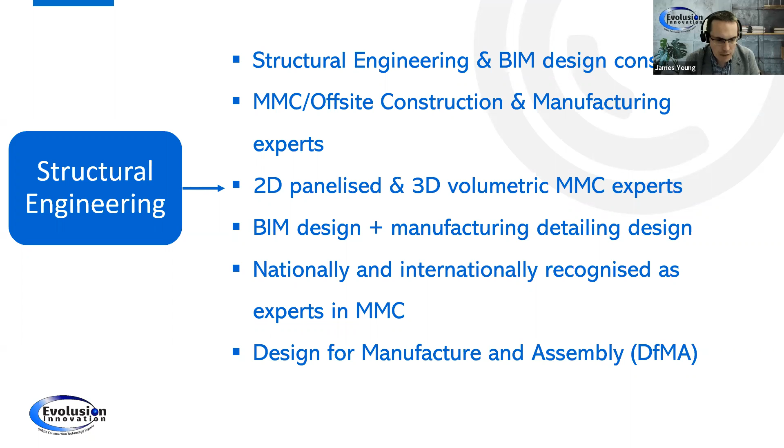We are MMC construction and manufacturing experts and work both in 2D panelized and 3D volumetric systems. As well as the engineering, we also work in the BIM design and the manufacturing detailing design end of it as well. We would be both nationally and internationally recognized as experts in MMC, and we work mainly around the philosophy of design for manufacture and assembly.

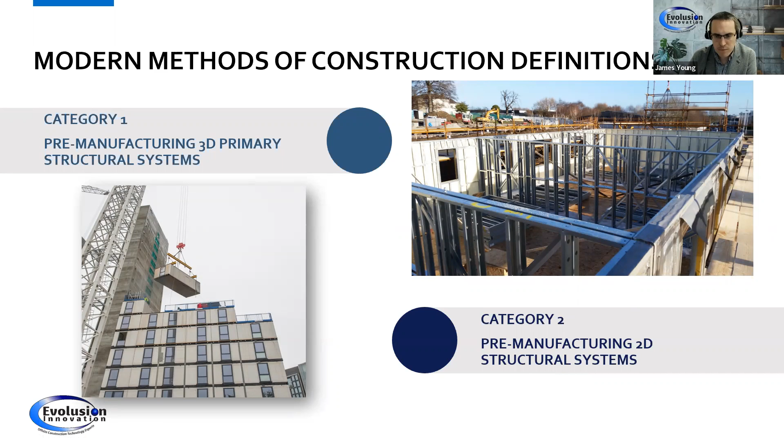The 2 main categories that we concentrate on are category 1, referring to pre-manufactured 3D primary structural systems, and category 2, mainly for 2D structural systems. Currently in Ireland, there's a few category 1 and a number of category 2 certified systems in steel frame. Darragh, who will be talking after me, is from Horizon, who will be one of the leading 2D panelized companies in Ireland at the moment.

When Evolusion work on any MMC project, we have a specific design process we use to deliver the projects from conception to completion on site. The process in which we work is designed to cater for the needs of pre-manufactured elements. The timing of manufacturing is different to traditionally built structures, and this has to be taken into account. So the 4 main items that cover this are your structural specification, the pre-construction model, manufacturing detailing, and assembly drawings. So I'll briefly go through all 4, but Darragh, I'm sure, will go through the final 3 points of mine in greater detail in his presentation.

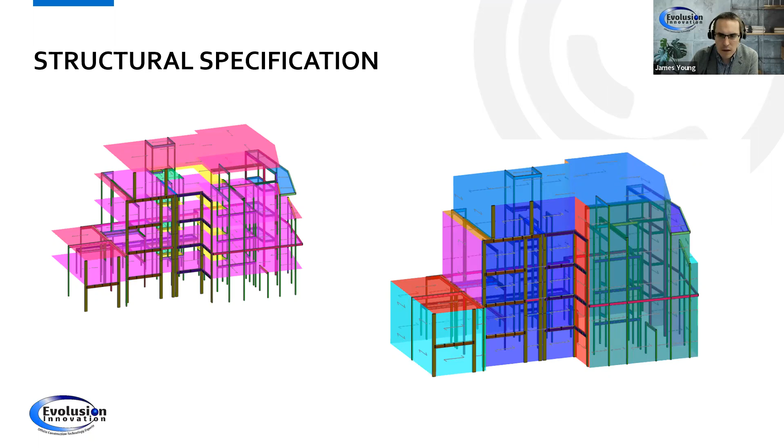At the structural specification stage, this is digitally modeled, but it's digitally modeled in similar ways to if it was any other building. However, as we generally work with systems required to be manufactured off-site, the digital design process of the physical elements is set up to suit the off-site design systems to ensure a high degree of accuracy is achieved and time efficient to allow the manufacturing ahead of site delivery. Out of that digital model that we would produce would be your stud specification, your hot rolled steel, bracing, lintels, fixings, and obviously your foundation loadings.

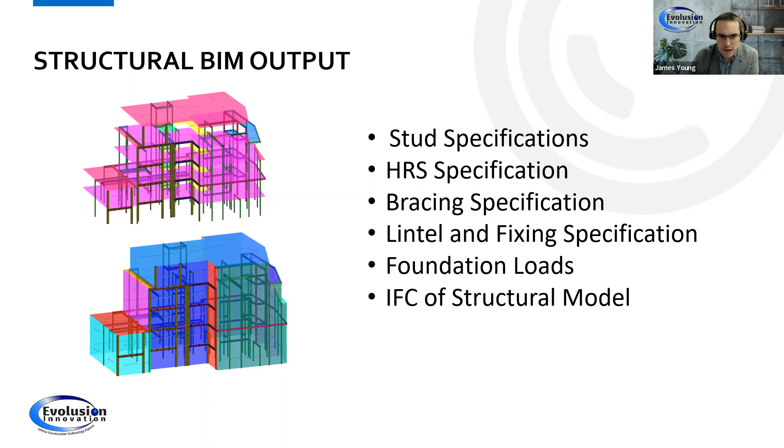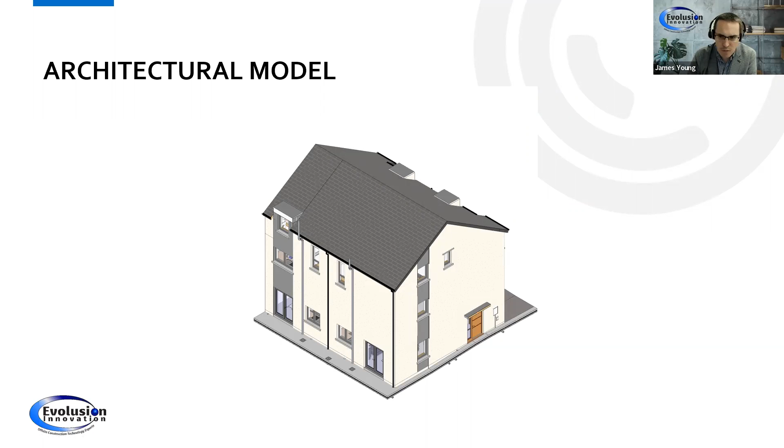And out of that, we develop an IFC model from our software analysis that can be moved on to the next stage, where we get into more the area of DFMA, or design for manufacture and assembly. When Evolusion works on any MMC project, we have a specific digital design process we use to help create the final manufacturing elements by the MMC supplier. Obviously, we will always start with an architectural model that more and more now is coming to us in a digital BIM format, but where we still get your traditional 2D drawings.

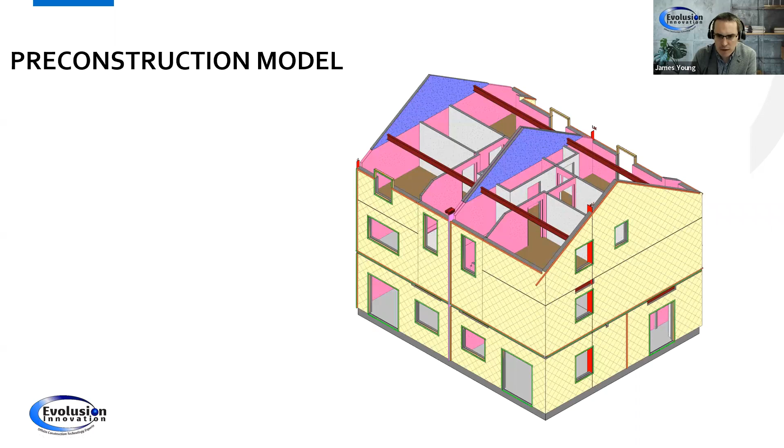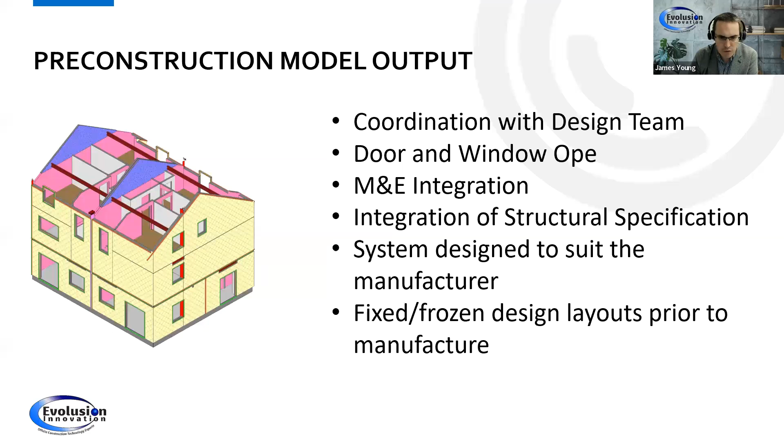But from that, we would develop a pre-construction model and create a model that is developed around the architectural model, but creates the information applicable to what the MMC manufacturer is going to produce. So within that, all families are parametric and are designed within the model to allow for each element to be tracked, procured, and manufactured. Again, Darragh will go into this in more detail, but the aim of the process with this model, typically for us in Revit, is to get to a stage where we have a fixed frozen design to start the manufacturing process.

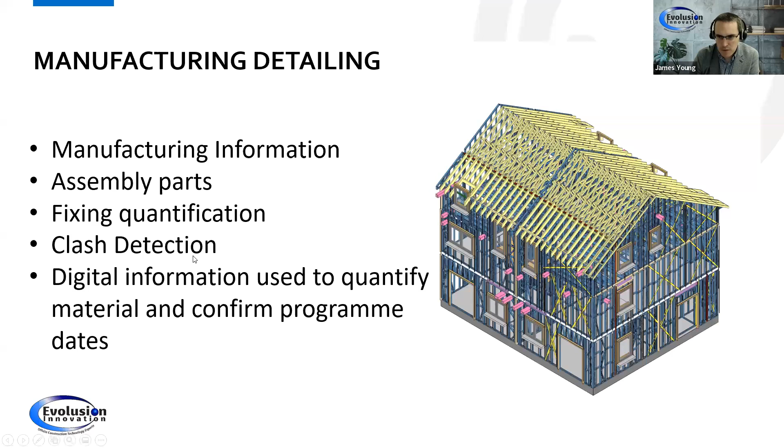Using specialist software, the structure is produced to allow for all the manufacturing elements to be fabricated, involving high degrees of accuracy. So you develop your manufacturing information, your assembly parts, fixing quantification, your clash detection, and the digital information that's used to quantify the material that one needs, and confirm program dates as well as other aspects of it. You're exporting hot rolled steel elements to your fabricator, and, I'm sure Darragh will go into more detail, your assembly drawings for your walls or your floors that go down to the factory floor.

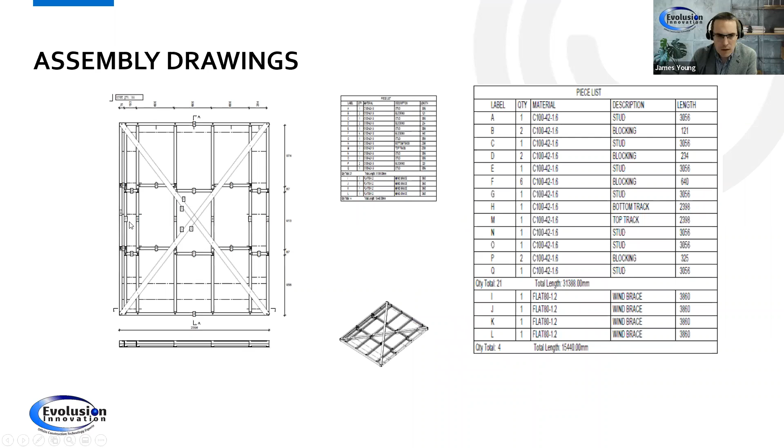The important thing when you're talking about MMC projects is obviously it all has to be pre-manufactured, but it has to be pre-manufactured to a high level of accuracy, some of which I've highlighted here. But to get to that stage, it's important that the levels of information through digital formats are developed and put together, working with the design team to ensure that when we get to manufacturing stage, these are the levels of accuracy that we're able to deliver and achieve.

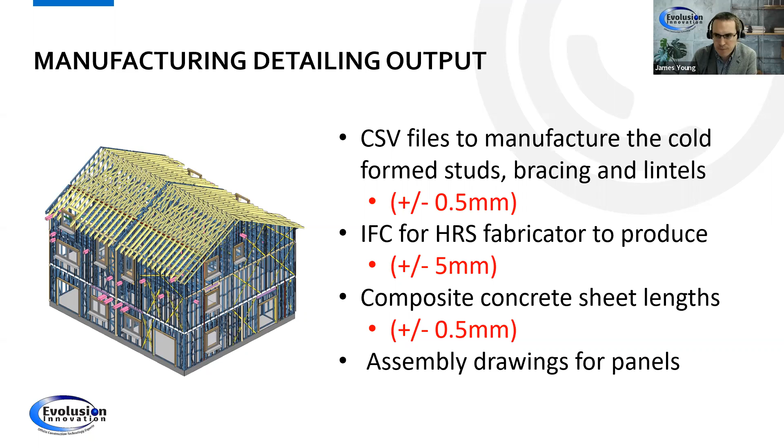Because precision engineered solutions require precision design processes. These are not systems that begin on site. This begins at the manufacturing facility. And the BIM design allows for accurate designs to be integrated into a particular structure to allow it to be manufactured correctly and on time. And our BIM design process is driven to allow for this to occur.

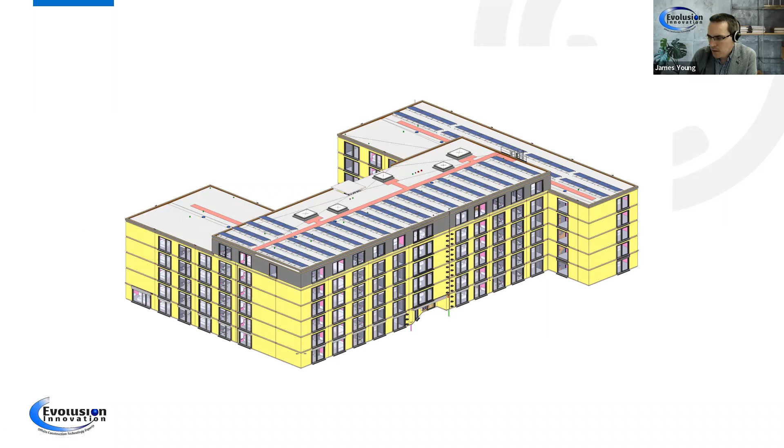Here's another example of a Horizon project. Again, you see we're at the pre-con stage, and then we're into the manufacturing stage. So whether it's housing or large scale developments, we apply our processes as required. And these processes, as I'll touch on in a minute, drive sustainable design solutions, significant reductions in waste, time savings of anything up to 25%, even more can be achieved.

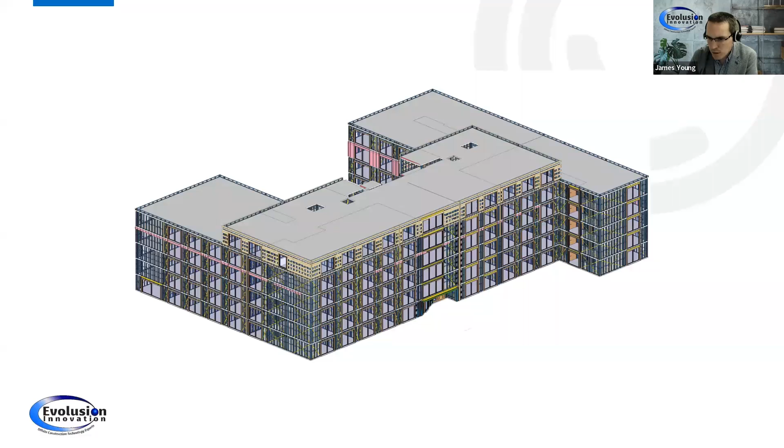In terms of Evolusion's track record, specifically for MMC buildings, we have a significant track record in both Ireland and the UK, be it student, hotels, residential, educational, and healthcare. Some of the projects that we've delivered are various student accommodation, hotels, more student accommodation, significant student accommodation projects, a significant amount of social housing and apartment developments that ourselves and Horizon are doing currently,

as well as healthcare facilities, including this one, which was done in Limerick in 2020. And as you can see, obviously it was a unique time period for a lot of support for the country, but with the processes and the design team involved, that process started on the 25th of March and delivered practical completion by the 2nd of July. So the process helped drive that rapid design.

In terms of what we see next, I suppose the two main areas I would put out there are obviously sustainability and another area in terms of thermomechanical engineering. So in terms of sustainable designs, sustainable design is now a key focus on all construction projects, and it's something we're strongly committed to in driving and enhancing in our designs.

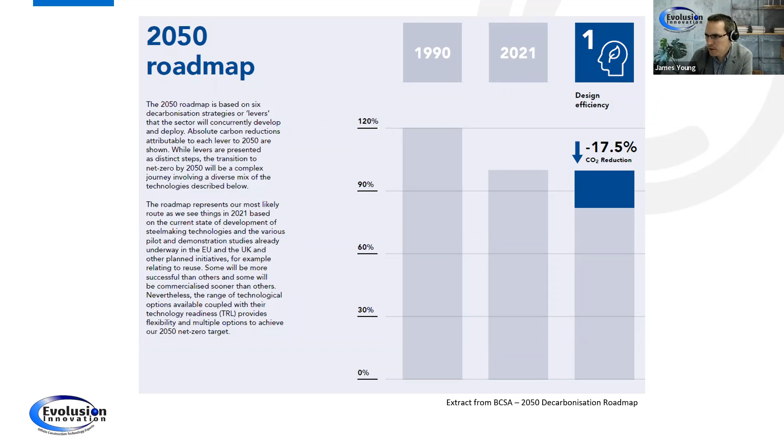This is a decarbonisation roadmap issued by the BCSA, where they've outlined a number of steps how this can be achieved, starting with design efficiency and also working its way down to things like circular economy, the emissions of the steel making, all the way down to your steel transport, fabrication, and erection. We are already collecting the digital information, as you would have seen from the information I put up before, to look at optimizing how we can produce sustainable structures.

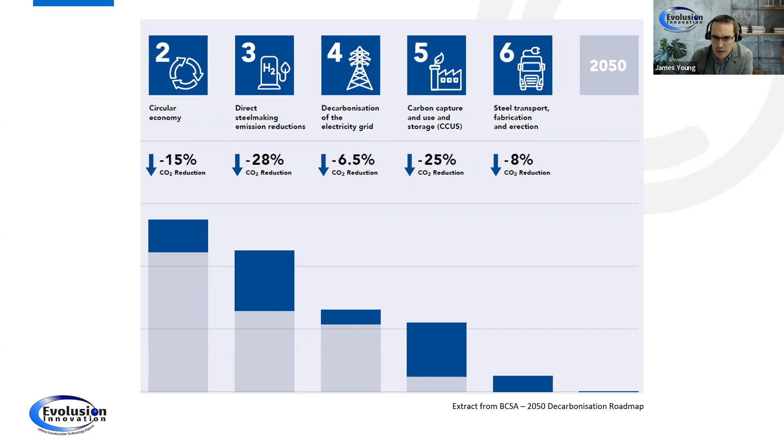the embodied carbon output. We already track a significant amount of data digitally through our design processes, as you would have seen. So we are starting to learn how to apply this at an earlier stage to guide us in terms of more sustainable designs and drive the use of more sustainable materials.

The other area that we're looking at in terms of a digital future in MMC is the area of thermomechanical analysis, which is the analysis of a structure under heat conditions. So it's the application of testing for significant buildings down the line to potentially analyze how they perform in a fire situation. So those are two of the areas that we're really looking at in terms of taking where we are currently from a digital perspective and seeing how we get to the next stage and drive it for the future, for the many challenges that lie ahead for us.

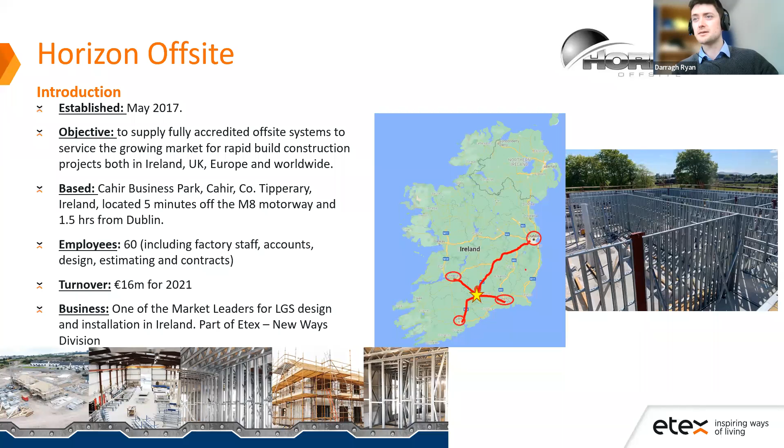Okay, we've got 2 main stud sizes, an 89mm stud and a 100mm profile. The gauge or thickness of these ranges from 1.2 to 2mm. We have 4 roll forming machines on site, and the facilities in Cahir include over 3,150 meters squared of internal manufacturing area and 18,000 meters squared of external storage yard space. And we're planning to further expand into the business park. We already own much of it, but we're planning to expand in the coming years.

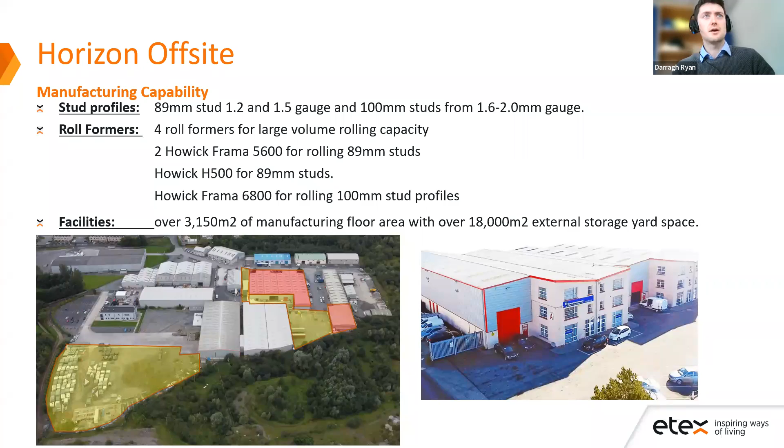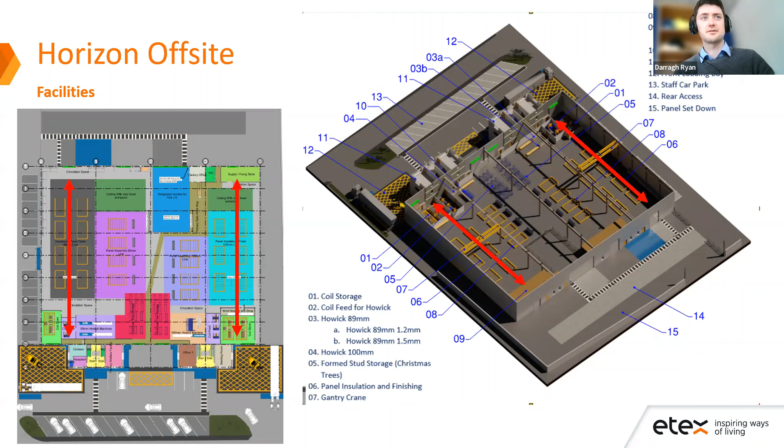So this is a 3D model of the manufacturing plant. The aim is really raw material in on one side, and completed panels out the far end. So there's 2 production lines with overhead gantries, as you can see there. Okay, and what we offer clients.

So there's a couple of different options on the external walls, because, as I said, we're a full system, a through wall provider. So we can do a lightweight render system, which can be a greenspan aqua panel system, and as part of that system in the factory, we assemble the light gauge steel, the insulation, and the carrier board. And on site, then, that would be counter battens, the cement board, and then the render would be put on site. Most of our sites still use brick and masonry block. Usually these buildings would be low-rise, and we would apply the insulation and wall tie channel in the factory and deliver the panels to site pre-assembled. The brick block then would be built on site.

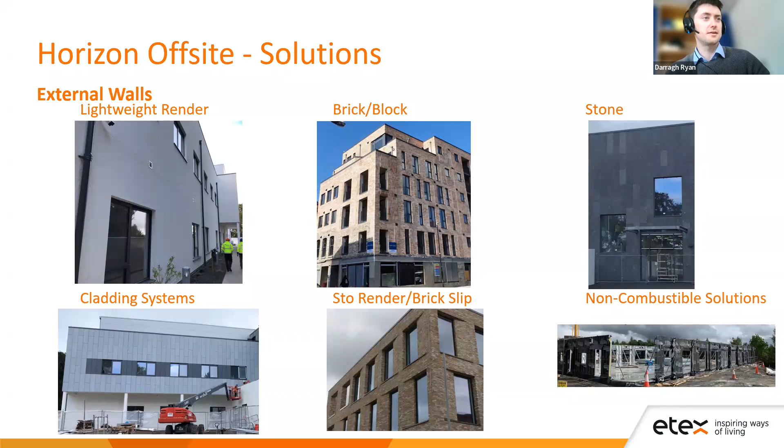Okay, moving away from external walls, we also do internal walls, both load bearing and non-load bearing, decking for the composite slabs, composite concrete slabs, and we design and install light gauge steel floors as well, which can be light gauge open web trusses, or it can be a C-section with OSB board.

Okay, we can include the balconies, which can either be lightweight or concrete decking, roofing solutions, so light gauge steel roofs, timber roofs, decking roofs. And we also do panelized infill as well, which usually is a frame and a board assembled in the factory and lifted into position on site.

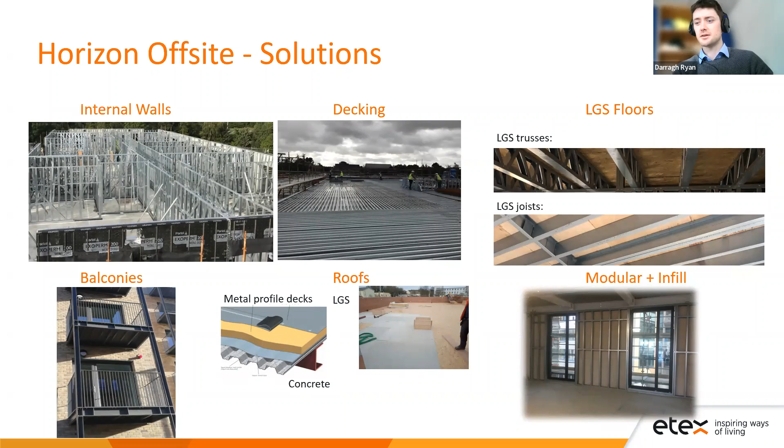Okay, so as with most modern methods of construction, the testing and accreditation is extremely important. The main one for us is the NSAI Agrément certificate. NSAI stands for the National Standards Authority of Ireland. It is a state agency in Ireland, for those of you who don't know it. So it's proof to clients and architects that the product is suitable for use under Irish site conditions, and verification then that the materials and construction outlined in the certification is in accordance with the Irish building regulations.

So the NSAI Agrément certification is designed specifically for new building materials, products, processes that do not have a long history of use, and where there's a lack of national standards. So therefore MMC and light gauge steel modular would certainly fall under this jurisdiction.

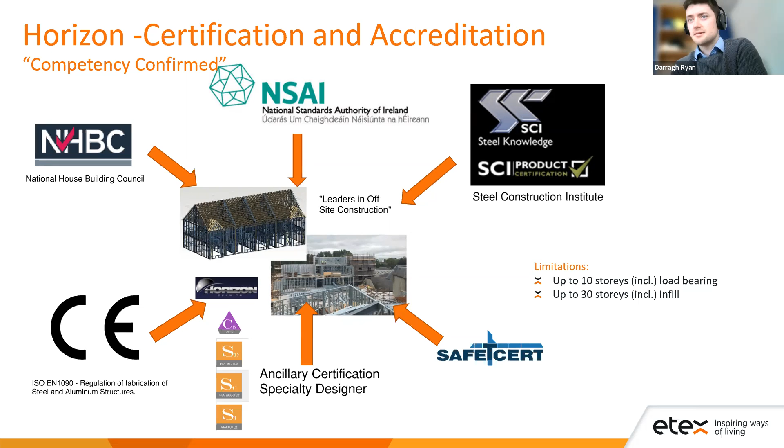Other certification we have: we're accredited with SCI and NHBC. We have EN 1090 CE certification, and upon completion of design and installation, we also issue the specialist designer ancillary certs and a specialist contractor CS cert. And we're A rated with Safe-T-Cert and a couple of others.

Okay, so the heart of the Horizon system is accreditation and testing. We've got 33 load bearing tests carried out with our stud profiles. These are fire from both sides, so we've out to in tests, we've in to out tests, and the tests are carried out not in the Horizon facility, but in accredited independent laboratories, like Efectis in Belfast or France, BRE in the UK.

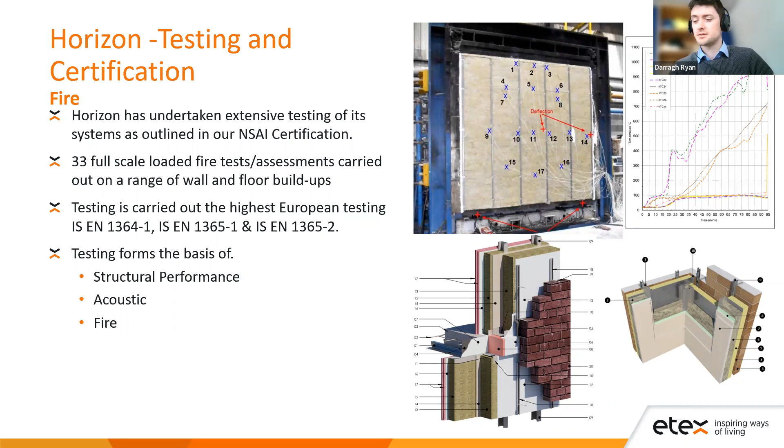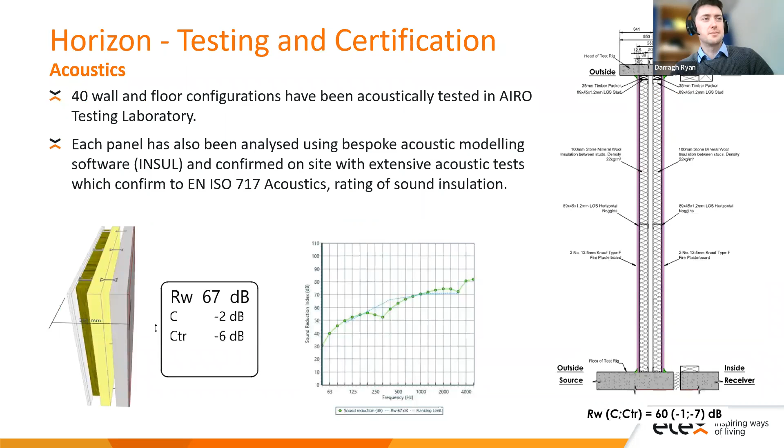Our tests would be carried out with voids in the plasterboard for sockets, just to try and simulate real world effects of pattress boxes in walls. We've also carried out some junction testing for key junctions as well. Apart from the fire testing, we also have acoustic testing done in laboratory conditions. We've over 40 tests done, and we've got modeling done to simulate other scenarios which are similar to the test scenario.

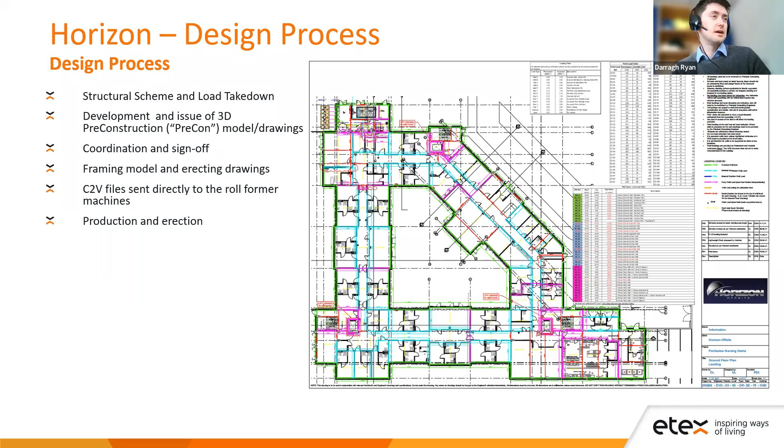Okay, so now I'll move on to our design process in getting product from the design and conception stage forward to site. James has touched on this, but the first step in the design workflow, following appointment, is the structural scheme and a load takedown. Initially this is just a basic PDF markup, color coding wall types, line and point loads in each direction. That's our initial one before it gets fully digitalized.

So that's the start of our information management process, and it leads to the design, fabrication, and ultimately construction of the Horizon system. The digital delivery system stems across our entire company, and everything is interlinked and traced back to this pre-construction model.

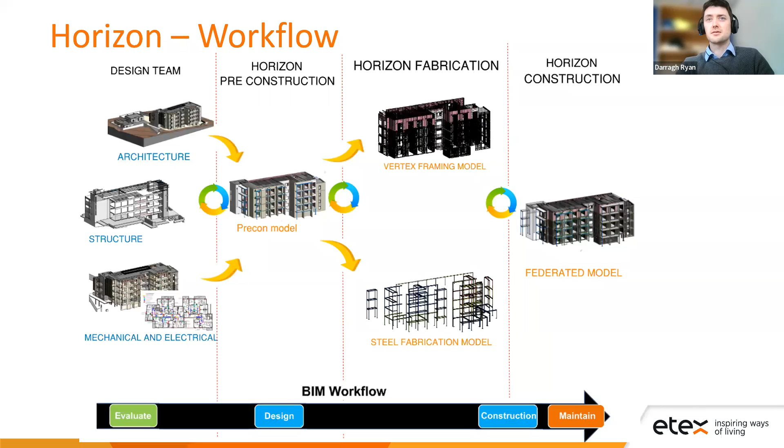That pre-con model forms the basis of all coordination with the design team. It's an iterative process for general spatial coordination, such as, are the walls in the right place? Are the windows in the right place, and are they the right sizes? We put in hot rolled steel sizes, make sure there's no clashes there, and incorporate the light gauge steel system requirements, so details, to make sure it's in accordance with the NSAI approved system.

Okay, so the model is essentially a digital twin for the information gathered throughout the design process and the basis of all fabrication data following the design. Its process is iterative. It's ongoing until we get sign off of the model, so it's signed off and approved by the design team.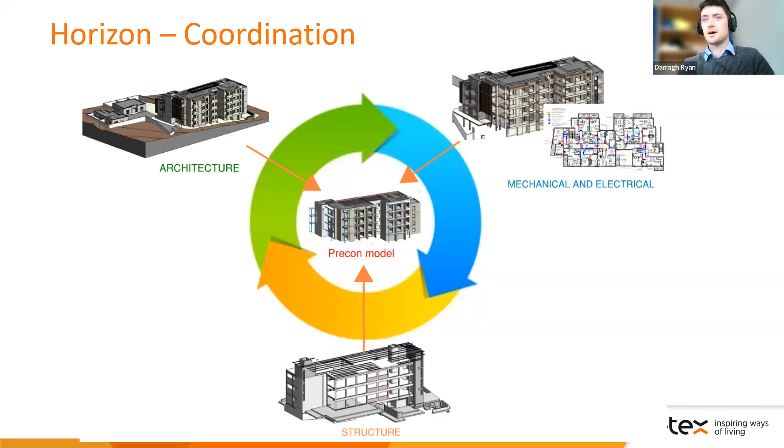The architect has checked it, M&E has checked it, project engineer has checked it, and everyone's happy with the setting out. And then we begin to disseminate the information to form the light gauge steel framing model and the hot rolled steel fabrication model. This shows that dissemination of information. From that pre-con model, we internally distribute the required information to each team, and each team still has full access to the pre-con model.

So any changes are updated in real time. So the hot rolled structural steel, because our schemes are hybrid. Okay, we do light gauge steel, but we also incorporate hot rolled columns and beams into that as well. So the hot rolled structural steel is fed from the structural design software into the pre-con model, and then from the pre-con issued to the steel fabricators for the production of the steel drawings, and the ultimate fabrication of that steel.

Then the light gauge steel detailers have access to the pre-con and steel model, and then they detail the light gauge steel panels around the hot rolled, ensuring there's no clashes. Because if they were working in isolation, there could be. So this ensures there's no clashes and everything is coordinated. So therefore the hot rolled and light gauge steel are coordinated from this signed off pre-con model, showing all the openings and architectural features and architectural requirements.

So the pre-con model is used in our quality control and quality management procedure to verify and check each component. And we have certain stop phases where we do full checks between design and detailing and fabrication checks, and everything is checked back to that pre-con model. And then from that pre-con model, we issue out the PDF drawings and DWG drawings, material takeoffs, panel layouts to the design team.

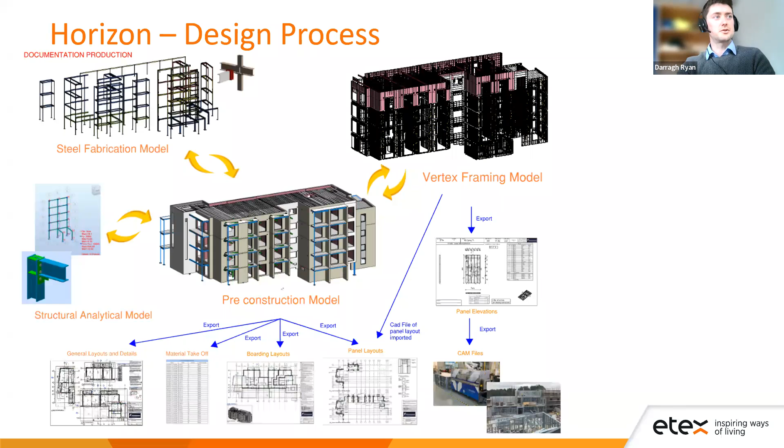So the digital delivery process is the heart really of our entire company. So with production and the access to large amounts of data, we have to manage the creation, publication, and dissemination through the construction life cycle of the project. And then this leads to information supply to the client for the operation life cycle. So all our digital data from the pre-con, feeds from the design stage, inputs from site are put in, and we have an as-built construction model, which we issue as a federated model of the system for the client to manage throughout the life cycle of the building.

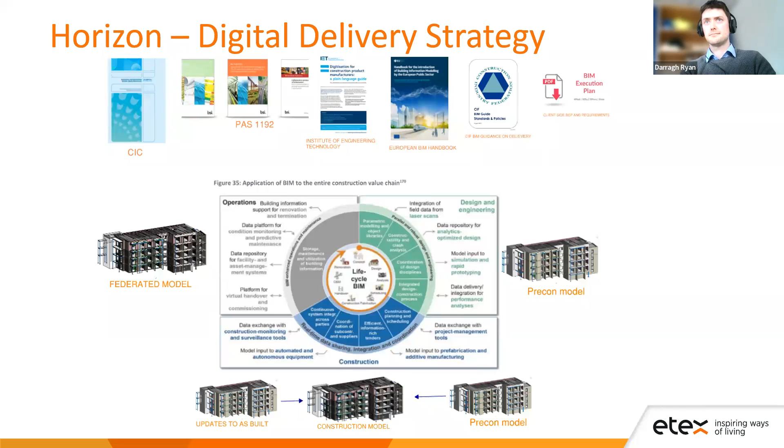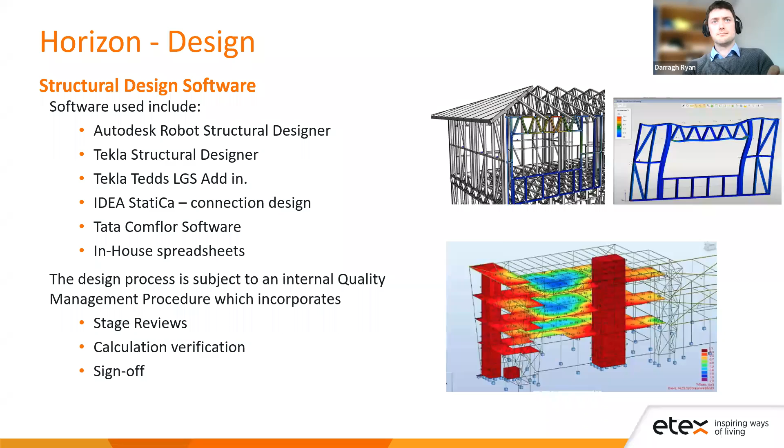Just to talk about some of our structural design software. So we use Autodesk Robot, Tekla. We have some Tedds add-ins as well, but a lot of our work comes from in-house spreadsheets as well. And then in terms of our drafting software to make that pre-con model, we use Revit as stated earlier, and for the framing or detailing model, we use Vertex. And the two softwares can be fully interlinked, and they work together quite well. So one can be inputted into the other.

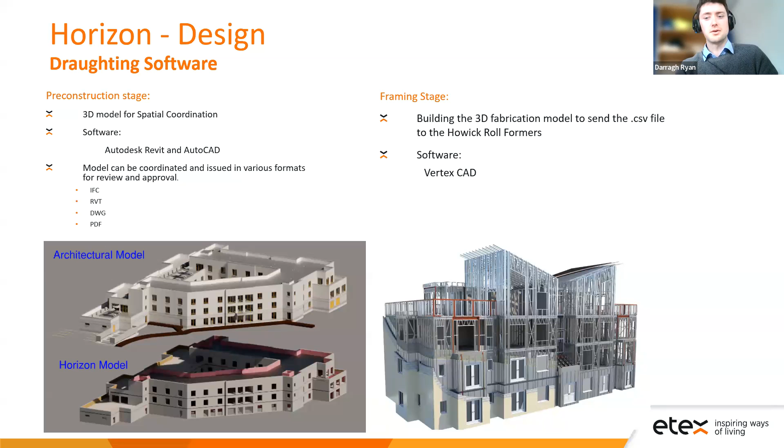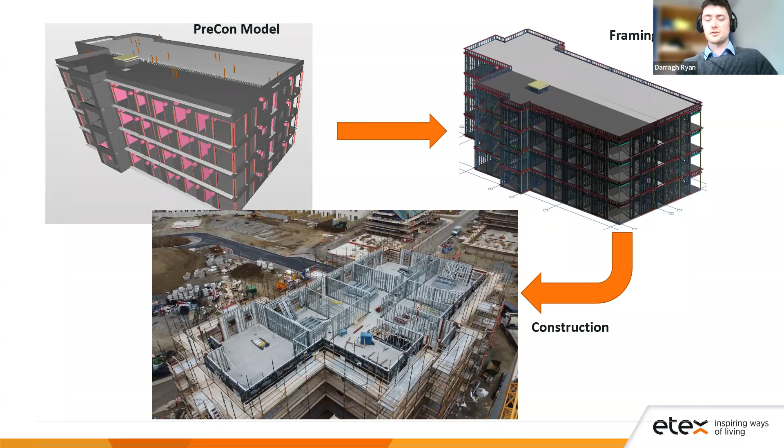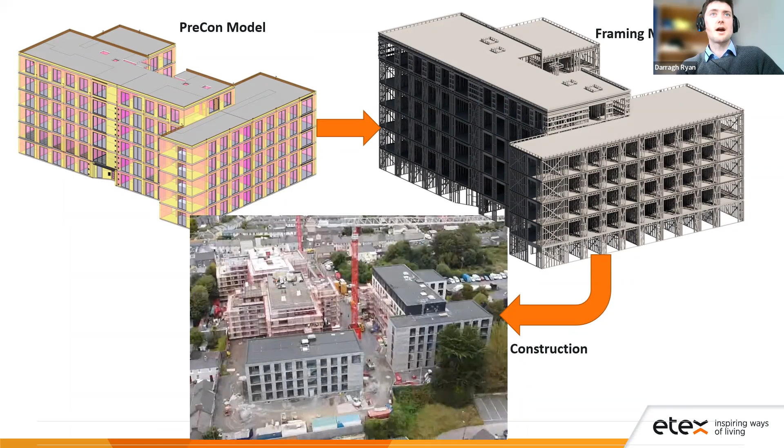So this process here just shows the flow. So we get the signed off pre-con model, and then we use that to create the framing and the hot rolled model, and then our panels are built in the factory, and we have construction on site. So this is just the same process for another project. It's the pre-con model again, and it's framed and construction on site. So the pre-con model is the heartbeat of the whole design process for us.

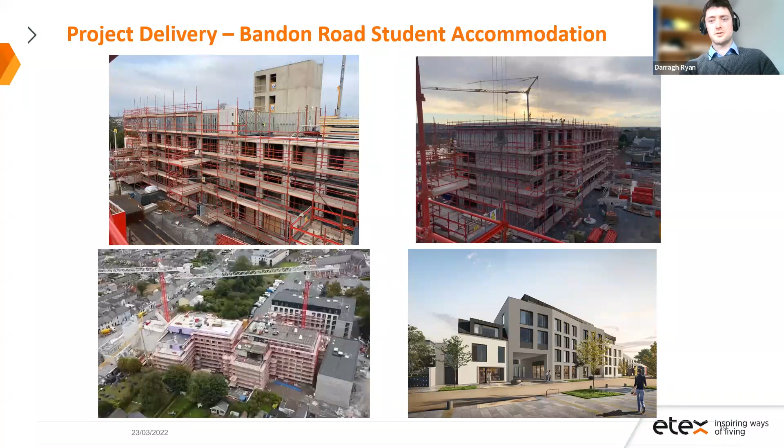Some projects that we've done, I'll just quickly run through one or two of these. Bandon Road in Cork, we've done 5 blocks of 4 and 5 story student accommodation. A very successful project. It's just gone for practical completion now. And we had the Roxboro in Limerick, very good project for us a year or so ago. And one we've just handed over is St. James's Cardiology Hospital in Dublin. It's on the St. James's campus. It's a 3 and 4-story building on the campus for cardiology.